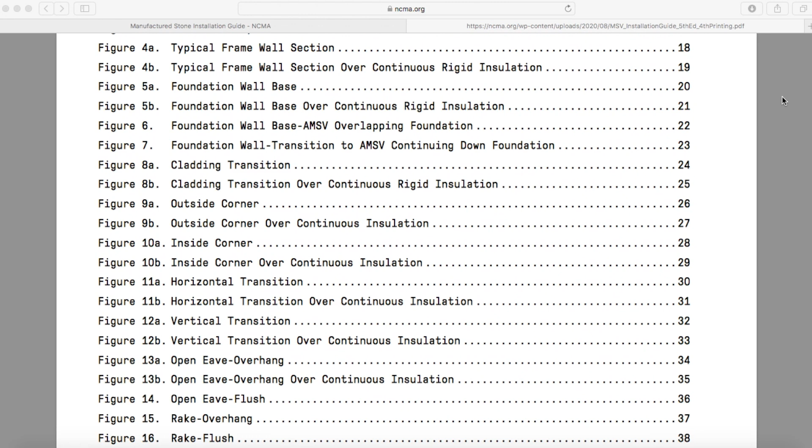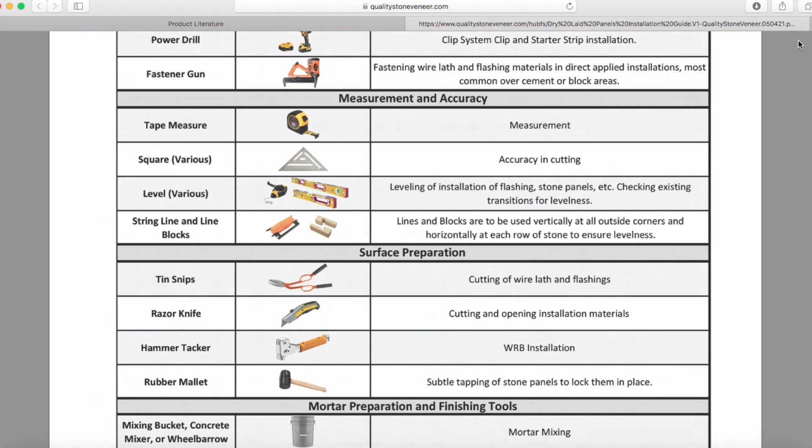Quality Stone follows all specifications set forth by the National Concrete Masonry Association's NCMA Installation Guide for Adhered Manufactured Stone Veneer. The latest edition of this guide can be downloaded for free from the ncma.org website or by visiting the Architectural Resources page of qualitystoneveneer.com. It is here you'll also find the clip system installation guide that corresponds to this video. Download this guide for a full list of required tools and up-to-date clip system specific procedures.

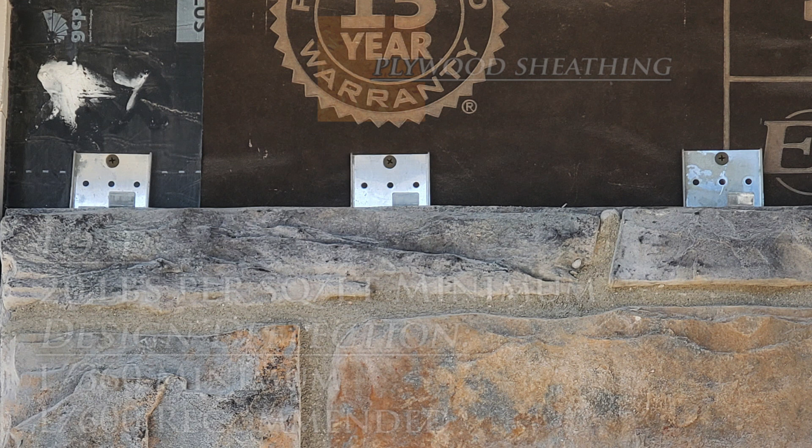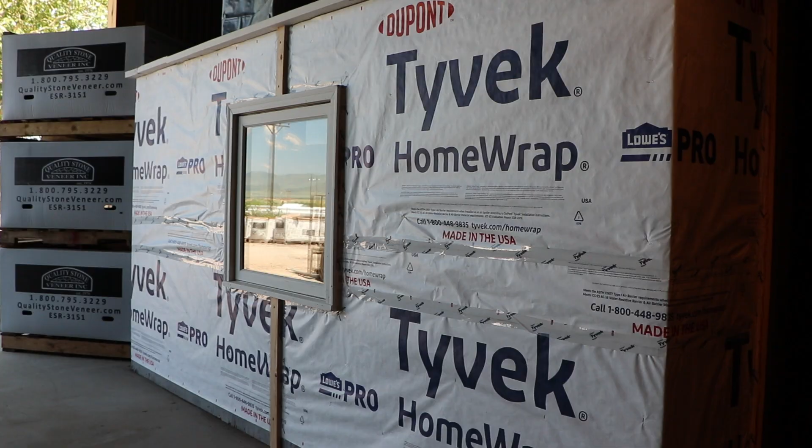General requirements. A clip system installation will require an exterior plywood sheathing capable of supporting 20 pounds per square foot minimum with a design deflection of L/360 minimum, although a design deflection of L/600 is recommended. The wooden sheathing will allow for clips to be screwed into the wall anywhere necessary across the structure, hitting studs where possible. A typical project will have one existing layer of Tyvek or similar pre-approved water-resistive barrier completed ahead of the stone install. Quality Stone installs the secondary layer of WRB over top the existing layer.

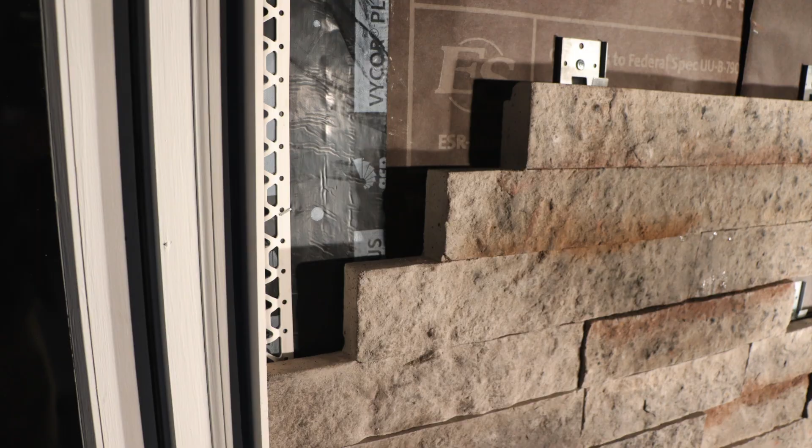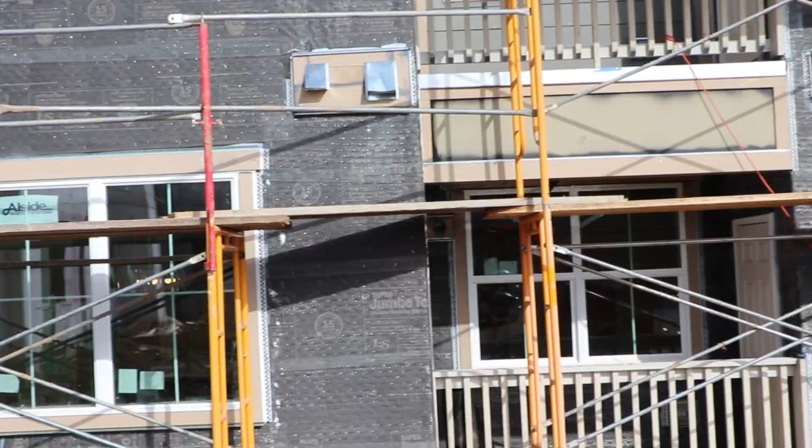Stone is required to be gapped from all dissimilar materials by 3/8 of an inch to allow for expansion and contraction. Failure to do so can result in material cracking due to a building's thermal movement. Before beginning, verify the job site is safe and free from all hazards. PPE should be worn by all. Check to make sure the necessary transitions, penetrations, concrete flatwork, windows, doors, soffits, and protrusions are in place. Cover and protect all existing finished materials with painter's tape, paper, plastic, or similar.

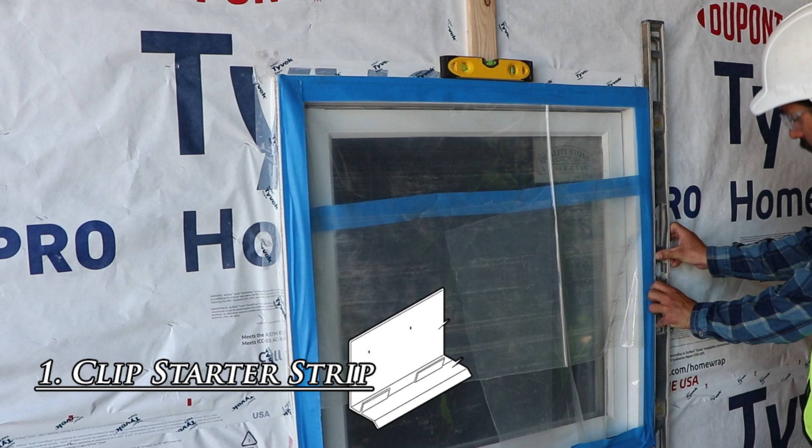Check for levelness using a series of levels in the stone area. Measure to the soffit to any windows and protrusions to best set the starter strip in relation to the protrusion. In this example, we'll be planning a measurement of our historic brick capped with a sill stopped just underneath the height of the bottom of the window.

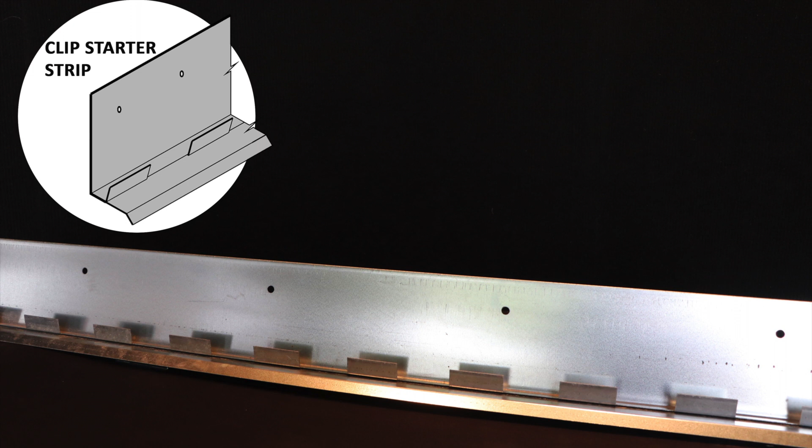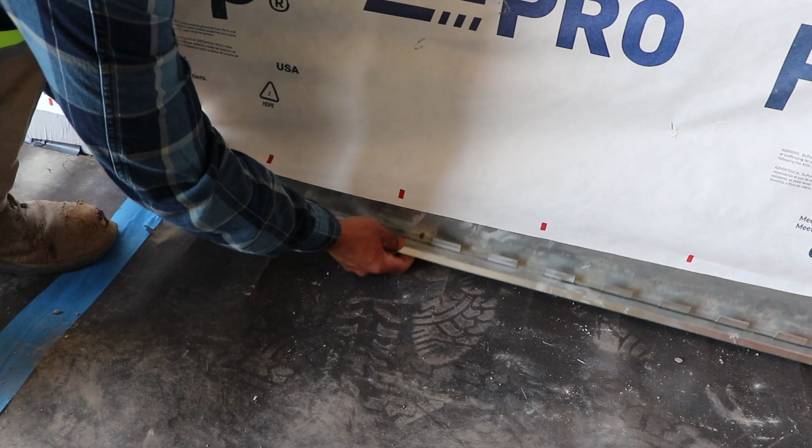Start out by setting and attaching the starter strip at the base of the stud wall. A chalk line is used as a guide for the starter strip to follow when it is being attached. The chalk line marks the starting plane you've measured and accounted for in the previous planning steps. The starter strip is a 22 gauge galvanized metal piece that acts as a weep screed flashing and starting clip attachment for the first row of stone. Proper planning and installation of the starter strip is the very most crucial step in ensuring a level system.

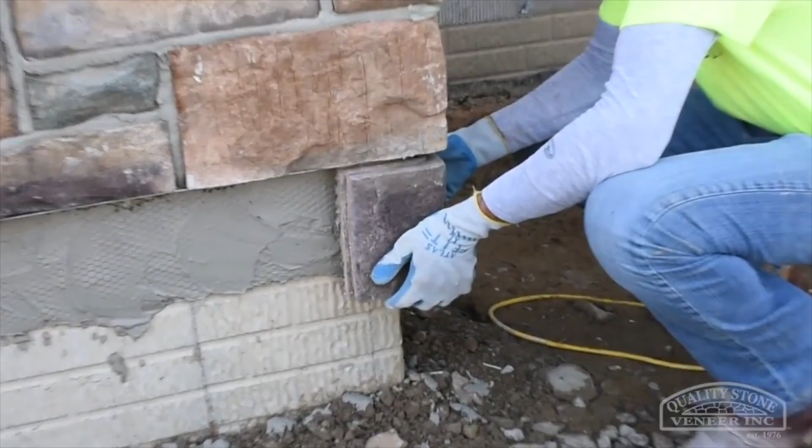In the field, this piece will overlap the foundation plate a minimum of 1 inch from the stud wall down onto the concrete foundation. The bottom of the starter strip is to sit 4 inches minimum above grade or 2 inches minimum above a paved surface. Reference detail QSV 32.0 in the installation guide. When stone is to continue down onto the concrete foundation, a run of self-adhered rubber flashing is to be applied, covering the framing to foundation transition before the starter strip is attached over top. Reference detail QSV 35.0 for this transition.

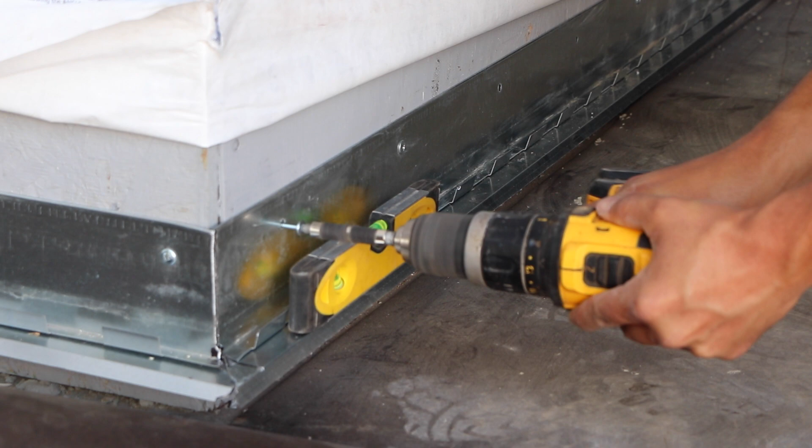Screw the starter strip directly into the wood structure under the Tyvek layer. Screws should be used every 8 inches. Bring the Tyvek layer back out over the 3.5 inch flange of the starter once it is attached. 45-degree angles can be cut at outside corners to join two starters together. Round corners to eliminate the sharp edge. Other required starter strip locations include horizontal floor-to-floor transitions at rim joist level and above windows, doors, and framed openings in stone areas. Detailed drawings of these transitions can be found in Quality Stone Veneer's Clip System Detailed Drawing Package or in the current version of the Clip System Installation Guide.

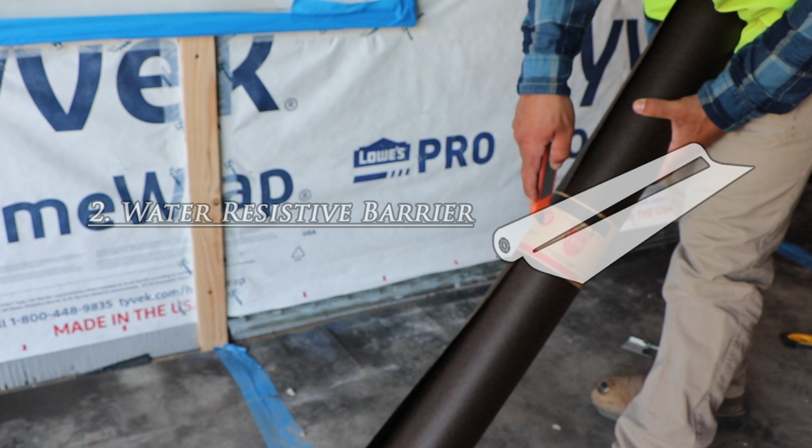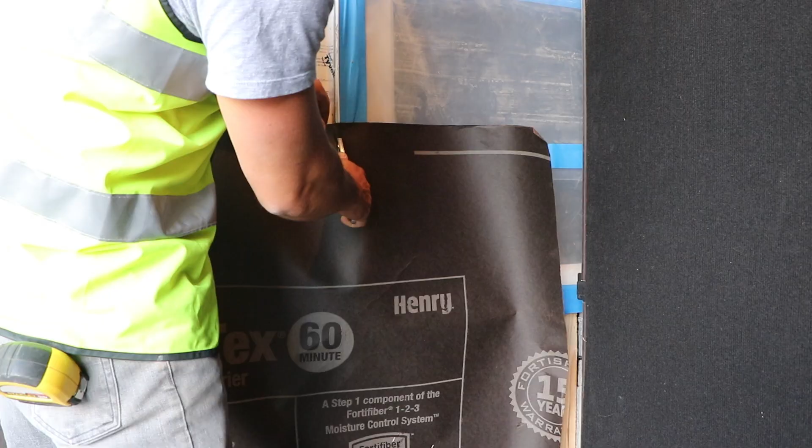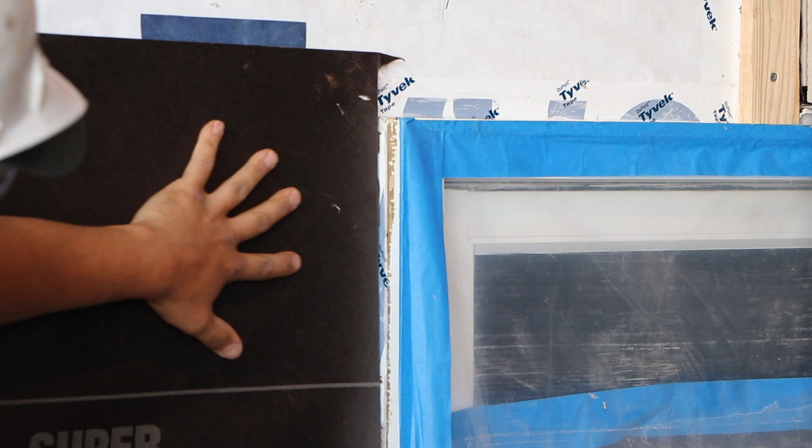Next, install the secondary layer of water-resistive barrier. Quality Stone specifies a 60-minute grade D paper. The WRB should be laid in a shingle-like fashion beginning at the bottom of the wall, overlapping the starter strip flange, and continuing upwards. Using a utility knife, carefully cut the WRB around protrusions, being careful not to come in contact with the existing layer underneath. At windows, WRB should be stopped 2 inches past the top of the window opening to be able to later properly integrate the remaining flashings and preceding WRB layer shown in the following steps. Keep in mind the vertical seams should be overlapped a minimum of 6 inches, horizontal seams a minimum of 2 inches, and outside corners overlapped a minimum of 16 inches past the corner in both directions.

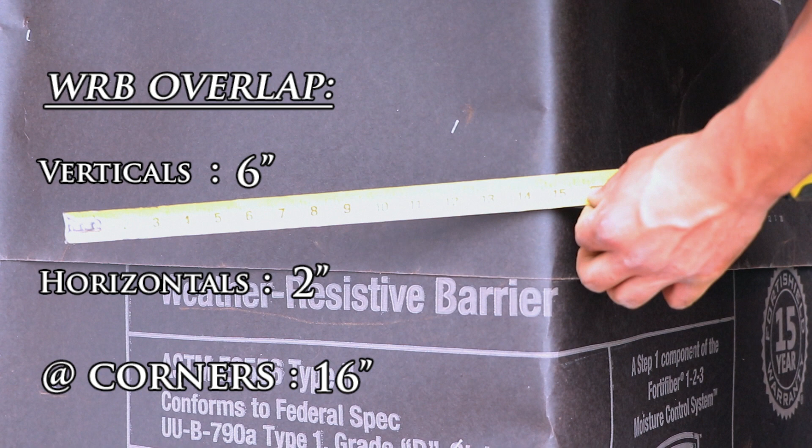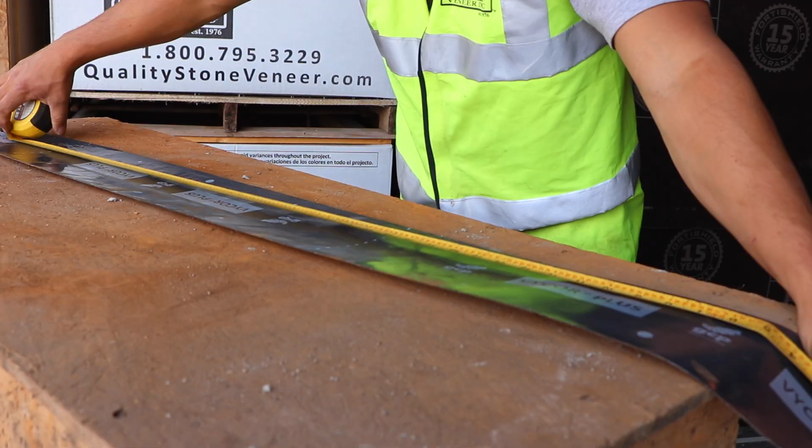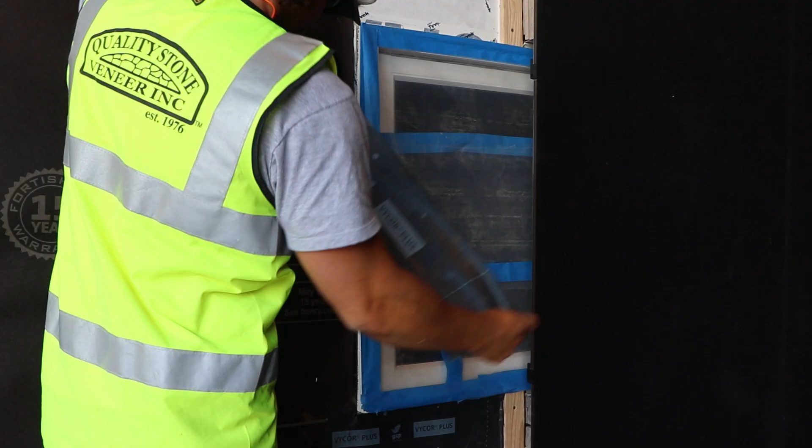Peel and apply 6-inch self-adhered rubber flashing tape to all 4 sides of windows, to doors, MEP penetrations, vertical transitions to dissimilar materials, and around any additional openings that may be in the stone area. At windows, begin at the bottom, then the sides, followed by the top, pressing the tape into the groove. As a note, detail under windows will depend on the window type. Windows should always be flashed per the window manufacturer's recommendation and following all local code requirements. Terminating the WRB just past the window head in the previous steps has now allowed us to integrate a layer of self-adhered rubber flashing to the top of the window before the casing bead, starter strip, and preceding WRB layer are installed.

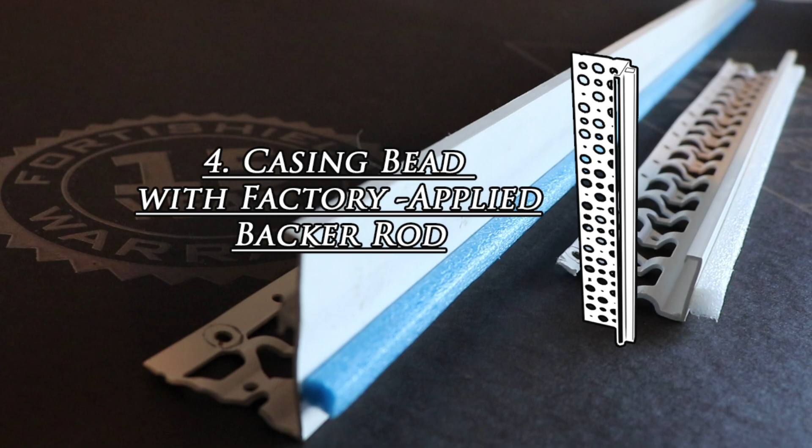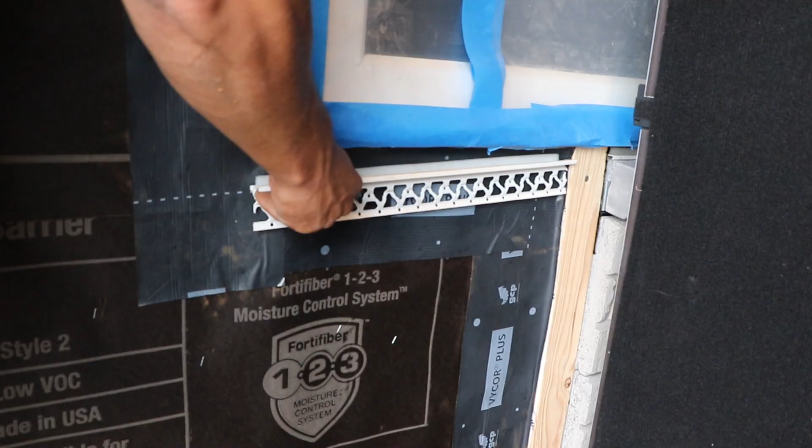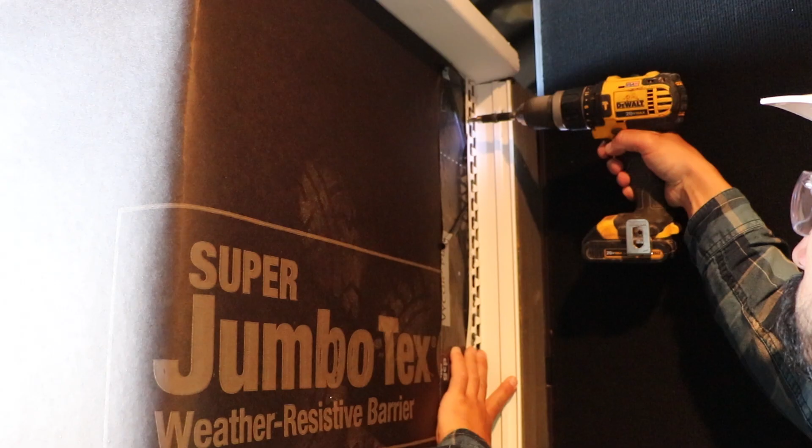From here, we'll install a vinyl casing bead with a factory-applied backer rod. This piece allows for the required gapping between products, a 3/8 inch flexible expansion joint that can be caulked later, as well as provides a precise termination point to perfectly cover any exposed cut ends of stone. This casing bead should be used at all 4 sides of windows, at doors, and penetrations within stone areas. It will also be used at vertical transitions to dissimilar materials, for example, where stone stops vertically at a trim siding board. Pieces should be cut such that one continuous joint outlines the entire opening. Quality Stone specifies various sizes of casing beads, with a 2-inch standard being most common for vertical transitions, capping the full depth of the stone.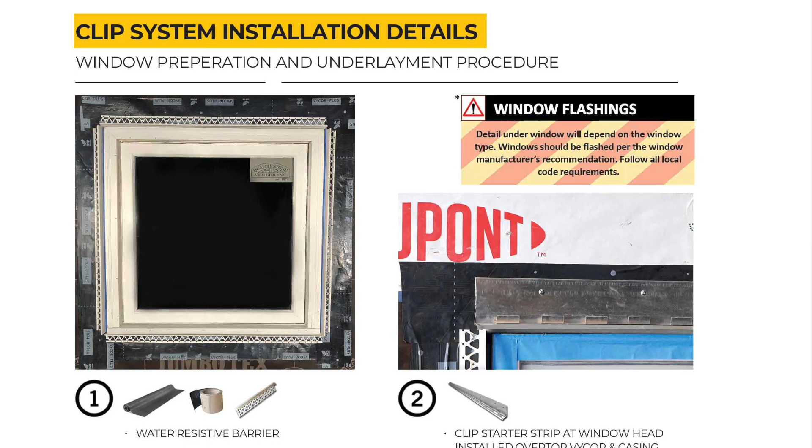The starter strip will now attach above windows, doors, and framed openings. Set the starter immediately on top of the casing bead, being sure not to compress the opening the foam backer provides. The starter strip is to extend the length of the window plus 1 inch of overhang in each direction. The next WRB layer should then be integrated with the starter strip, again overlapping the flange.

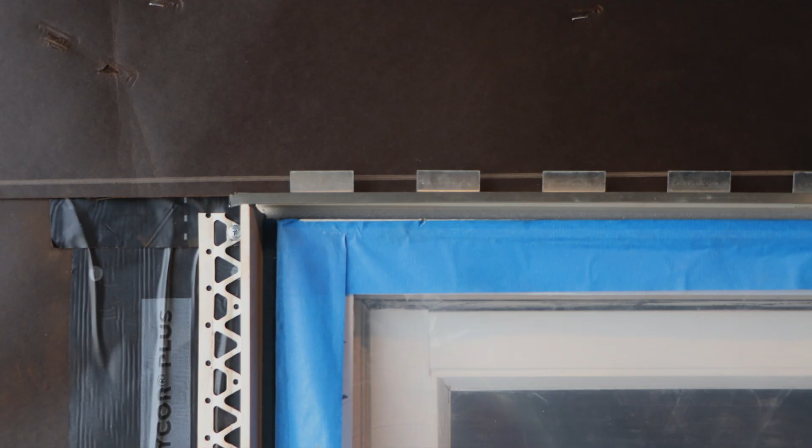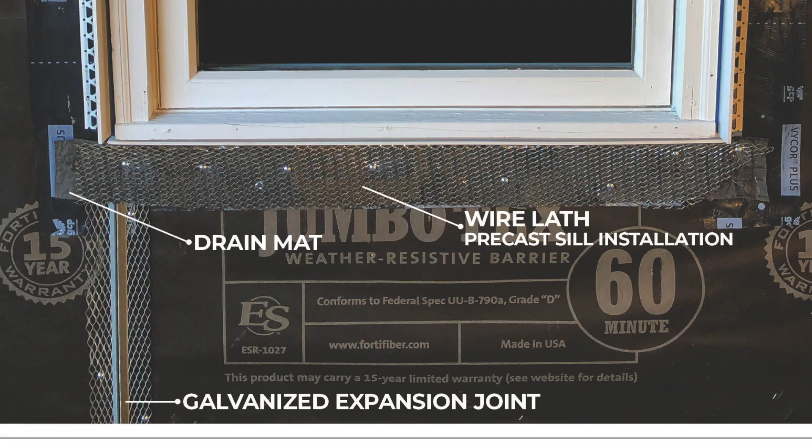Last, galvanized expansion joints should be set vertically adjacent to changes in materials and alongside windows and doors where possible, as a continuation to the expansion the casing bead already creates at the sides of these openings. Spacing is not to exceed 15 foot on center in any direction. In the next video, we're ready to begin our clip system stone installation.